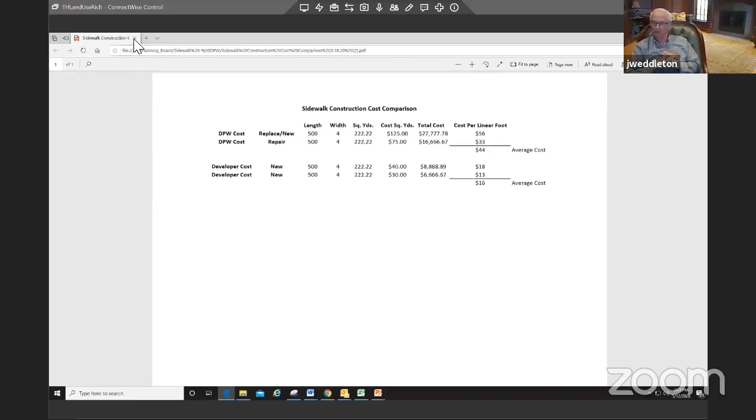Is there any way we could have the option of having somebody who's putting sidewalks on both sides of the street in a subdivision taken out, forcing them to put the sidewalk in a place where it's better needed? Because two sidewalks on one road is really overkill when there's so many streets in town that don't have any. I'm just afraid that it's going to be much more convenient for somebody on a site to just put two sidewalks in rather than pay the money or put a sidewalk someplace else.

Yeah, I think that's where we need to—well, I would say we have this policy and we'll have a cost per linear foot. But John, I agree with you. If we get in a situation where somebody says, listen, I'm just going to do what's in the regulations, it's going to be a balance. We want to try to encourage them in some cases, especially when there's two sidewalks. I think we'll probably be in a good position to encourage them that they're probably going to want the waiver on the second one.

And I think we can do that. We want to try to advocate for that. The idea would be, if it requires two—right now it's two, correct? Right. So on the residential side, it's up to 7 units, 7 homes, where there's only 1 sidewalk required. So for the most part, anything above 7 houses is going to require 2 sidewalks under the regulations right now, unless it's a smaller scale development.

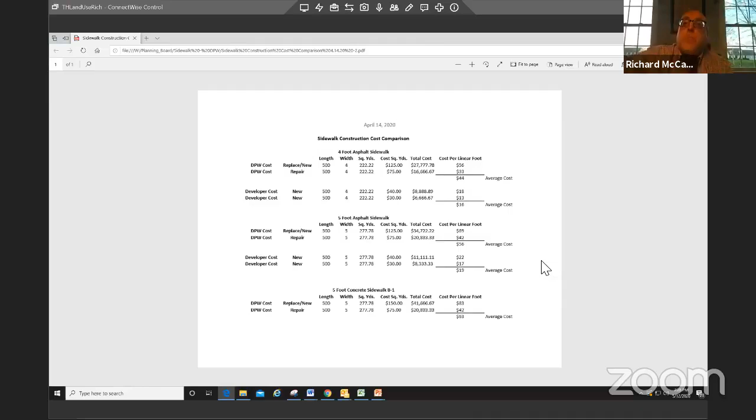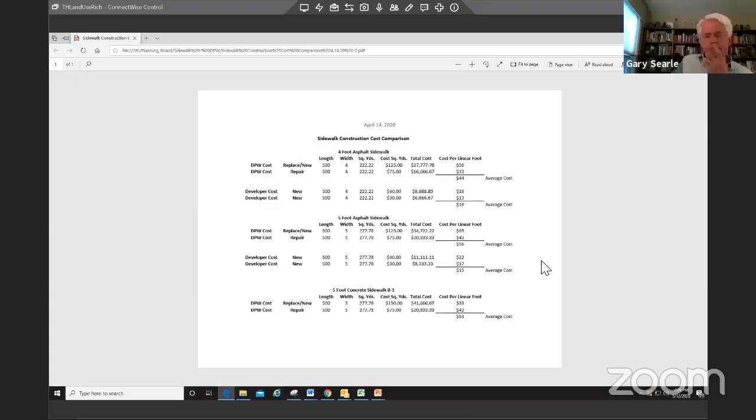So again, 30 sounds not like an average to me. If it costs DPW $70 a linear foot and costs the developer $22 a foot, the average is 45. Didn't we hear developers say they wouldn't pay that, that they'll just put sidewalk in for $22 a linear foot in front of their property? Yeah, I was trying to get to a price per linear foot that we would not discourage them with, so they'd give us money instead. Yes, I think the issue was the $10 we had in there originally - it's been going on for a few years - was pretty low. So we need to raise it so we can have some funds. And where's the happy medium?

I think Rich got the 30 because the cost per square yard here is based on a 500-foot length of roadway, so the actual cost per linear foot - for DPW it's 56 and 33, the average is 44. Developer is 18 and 13, so the average is 16. And I think that's where you got your 30, Rich. That's... well, go ahead.

I just put in 2,000 feet of sidewalk last fall, and I'll tell you, it cost me more in the range of $35 to $40 a foot. The reason this whole item is so hard to quantify - probably one of the biggest costs, even more than the paving, is the cost of the gravel to prepare the sub base. If you've got an area on organic soil, the cost to dig that out, put in a foot and a half of gravel, compact it, and then tar - for a developer that's probably more in the range of $40 a foot. If the gravel is already in place and all you've got to do is compact it and put the 2 coats of paving on, then it's probably more in the range of 25 to 30.

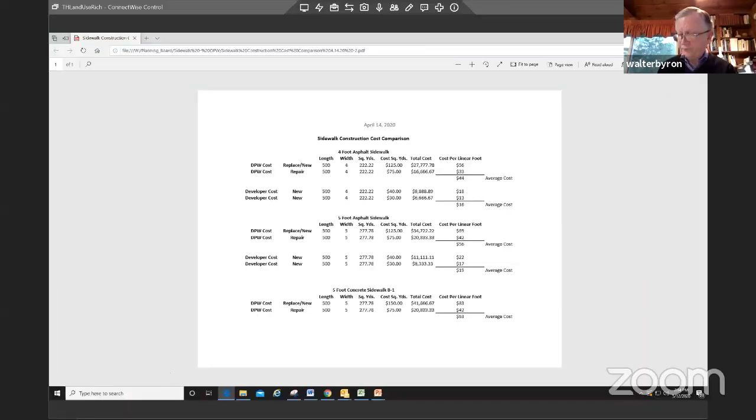Thank you, Gary. So I will screen share the language right now so everyone can take a look at it.

So the first article is removing the provision that would allow for a two-family as an option within the affordable housing bylaw. If you recall, this first came forward when Cranberry Heights was before the planning board. They were trying to give consideration to do a two-family. The more we analyzed and dug into it, it seemed really infeasible to make it work as a two-family and still work within the context of a development. The thought being there's not really a valid reason to have it on there since in practicality we really can't work with it. So the thought was just to remove it from the affordable section of the bylaw.

I did have some other conversations later with the Affordable Housing Trust as well, and they did agree, although I don't have anything in writing from them. We discussed that at a meeting, and it dovetailed nicely with the whole discussion with affordability, even with Norway Farms—although it's on tonight, it's not related to that specifically—but the whole notion of trying to integrate affordable, inclusive development, that there are other ways to accomplish the same goal. So this would just delete it from the bylaw.

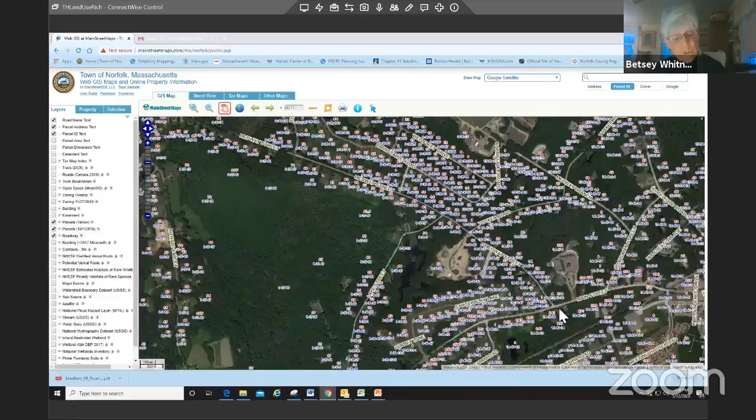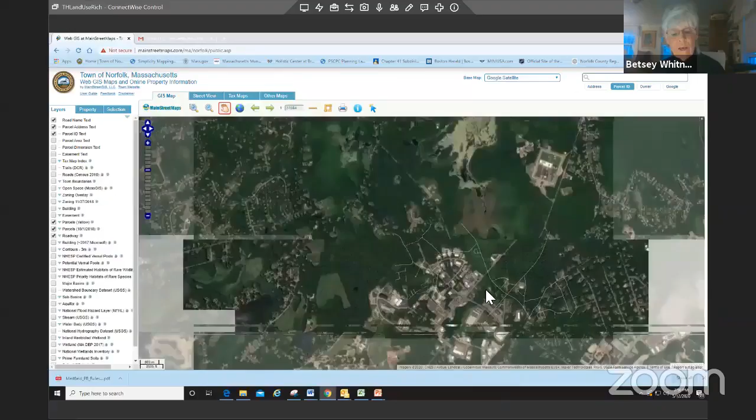My focus areas are the undeveloped parcels of land in the C1D district on Valley Street, Hill Street, Old Pond Road, and parts of both Pine Street, or Route 115, and Dedham Street, Route 1A, which lie in Pondville in the C1D district and may be pursued for development. And why have I done this? As a long time Pondville resident, some 39 years now, which I've said many times, I would sincerely love to have available the option of residential development by special permit in the off and on highway locations in District C1D.

If successful, this would add to the off-highway residential trend already voted overwhelmingly and begun at town meeting in 2013. That was bylaw J7A23. On a personal note, this particular town meeting, which I remember so well, the bylaw change voted 61 yes, 16 no, I believe is recorded proof that Pondville and the town of Norfolk in general have spoken.

I think it's very important to remember that this bylaw proposal is not intended to take away or stop commercial as a development right. It is simply adding the option to also be able to develop residentially, should a developer wish to go that route. And again, I emphasize that special permit is the safeguard.

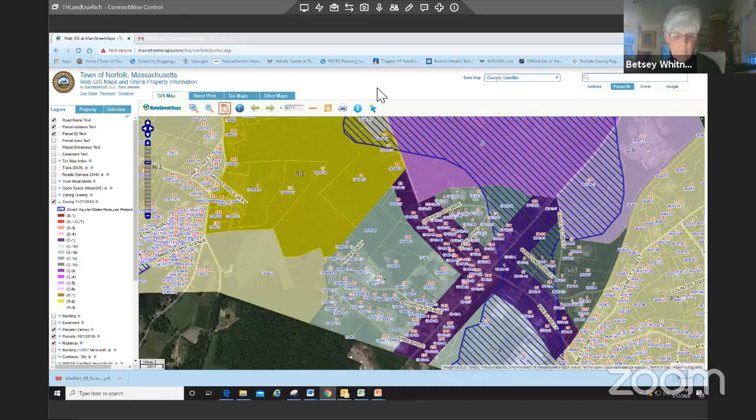So I am hoping that this article can be included in the town warrant so that perhaps Pondville will have the opportunity, at least the opportunity, to round out the residential areas that have already started in our district. Thank you, and I'll be very happy to answer questions.

Well, thank you, Betsy. I think one of the things that is a bit confusing to me and to Rich and to one or two other members of the board is we thought that what you're proposing is already allowed. And Rich would, I think, back that up by telling you where in the bylaws we believe what you're proposing is already written. So Rich, could you point that out? Sure.

Just to understand it, so this use C1D is where this already does allow this residential density. So I'm wondering, it sounds like your intent was just to add, and I'm just going to use my cursor, that you just wanted to add this language right here, not the C1D, because that already exists. This here, this provision under the J7A1C. I thought that referred to off highway.

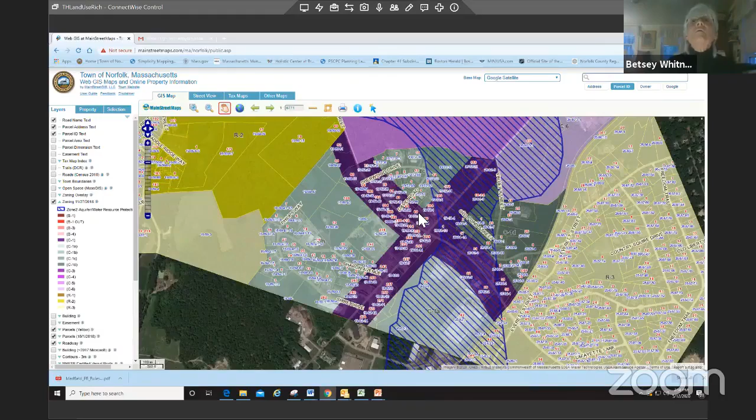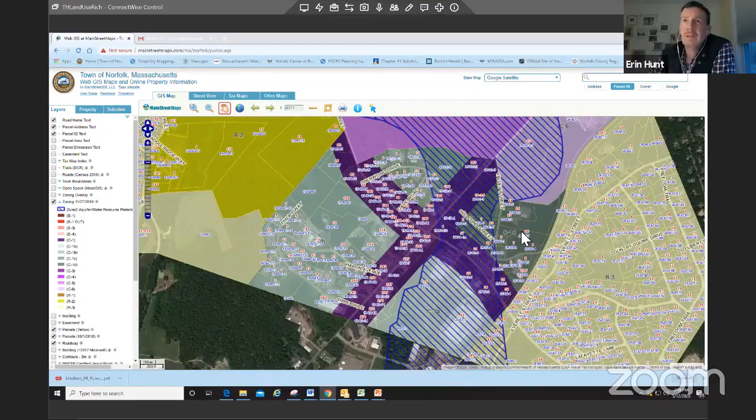So the purple, that's it, in the C1D, which is that upper area. No, this purple here. See this purple? No, that's C1, not C1D only. Rich, can you pull up the zoning map? Sure, can you see the map? Yeah, so this area right now presently allows multifamily housing.

That's what's on the books currently, under J7A2E. This proposal would amend and add into section J7A1C a special permit for multifamily in the on-highway section. This is the on-highway here, this purple. So on-highway, yes, Pine Street, Dedham Street. No, Rich, I disagree - it's just within the C1D part that's on-highway. That's right, just in the C1D, not the on-highway in the other three sections of C1.

So you just want this section right here? That's C1D - right here, see that C1D? That's C1C. Yes, C1D is the other side of 1A. So this section here? Yes, that was correct.

All right, so let's clarify - we're talking about the on-highway section within C1D, not the on-highway section in the other three sections of C1. That is correct, not the other three sections, C1D only.

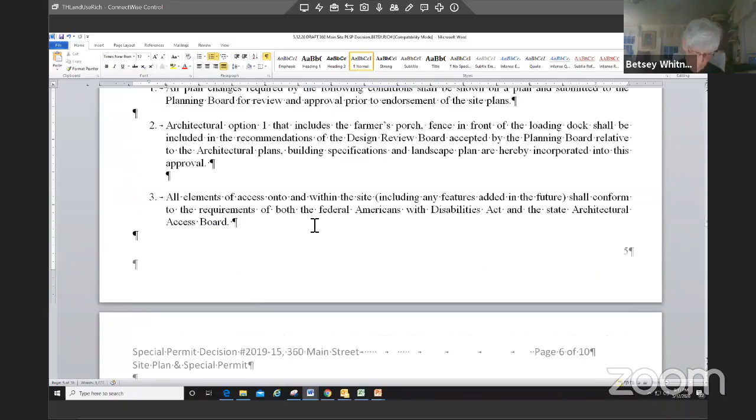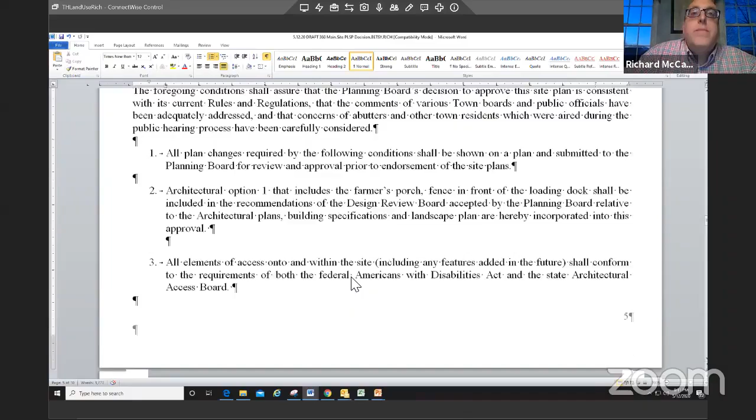So on page 5, I added architectural option into this condition for the design review board. The other comment Gary made was to spell out SWPPP, Stormwater Pollution Prevention Plan, because it was abbreviated. That was it, so all the other comments have been added into this final document.

Rich, can you scroll up so I can read 2, please? The planning board had wanted to have the makeup of the porch enhanced with a bigger fascia board and a higher pitched roof to give it more bulk. That was from the planning board, not the design review.

I can maybe separate it out, actually. Did they change their plan? Did they adjust the plan for that? They did. Who's on? Hey, you on?

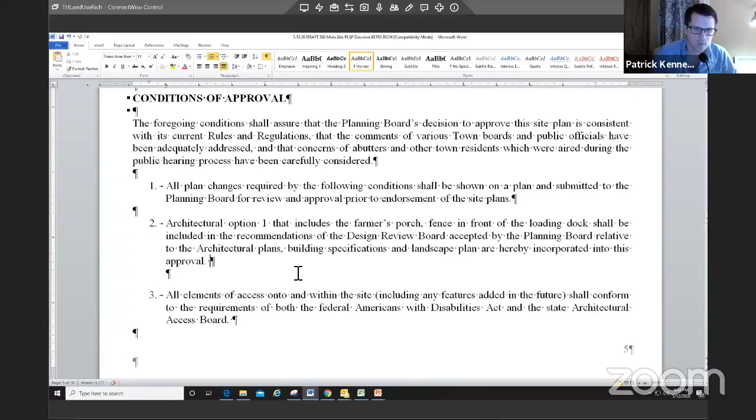Is Patrick on? Hey guys, this is Patrick Kennedy, the architect for Spec representing Camdra Coatings. We did not provide an update to the board regarding that. We have it in drawings, but we don't have it sent to you guys just yet. My recollection was you agreed to it at the meeting, but just haven't caught up with it in plans. Correct. We were going to just wait for the design review board to take a look as well, in case they had any comments.

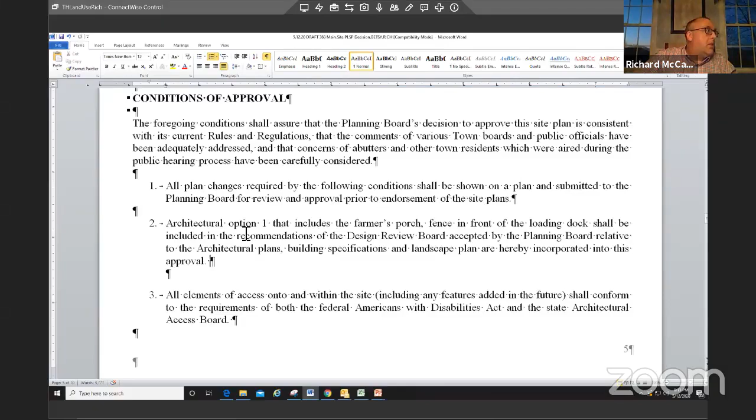So what I'll do, John, is I'll separate this out. I'll go back to the original condition relative to the design review board, and then I'll make this the condition of the planning board. As long as the design review board sees the adjusted schematic from Patrick, then approves it, that's fine for me. Okay, all right, sounds good.

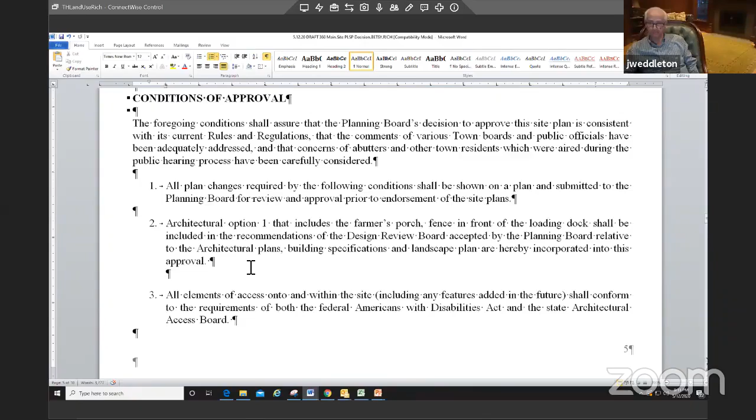Any other comments from the board on these three decisions in front of us? Any comments from anyone in the Zoom audience on these three proposed decisions? I just wanted to ask, this is Katie Enright, the project engineer from Howard Stein Hudson.

What was the number filled into the sidewalk fee? 30, 30 times whatever the linear frontage is. I believe it was around 100 feet, wasn't it? The number is 30 that she's looking for, 30 per lineal foot, but they want a dollar amount there.

Right, okay, so I can get you the number of frontage right now. Yeah, but the dollar amount was $30. There's a specific fee in the decision specific to this, we have 151 feet of frontage. 151 feet? Okay, so, 4530. 4,530. That's what the math says. Okay.

I'll put that in there. Rich, you put that in there too? Yes. Okay. Any other comments from anyone on board or in the audience?

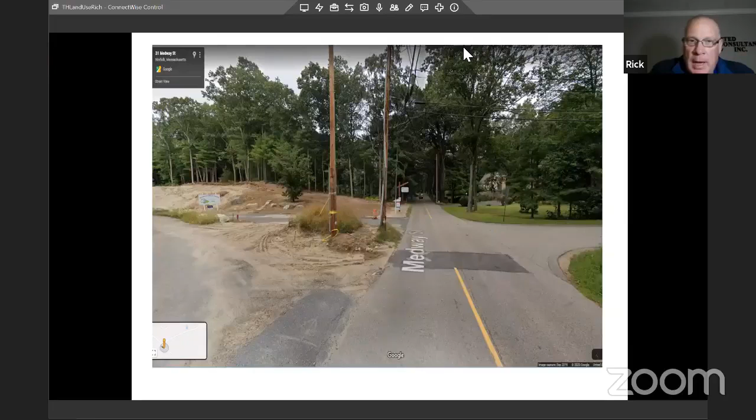So the proposal is to reposition the sidewalk slightly to the south of the original location, which was the guy wire for the existing pole. So the guy wire is really what's creating the bigger part of the relocation proposal.

So Rich, if we could—so what the proposal is, is to relocate the ramp, and you can see to the bottom of the page, just below Norway Farms Drive, that there's also a proposal which we wanted to discuss with you to eliminate the crosswalk and also to eliminate the sidewalk installation from Norway Farms Drive heading towards Lake Street. So that's why we proposed the ramp location further into the development and the elimination of the sidewalk and the crosswalk. We've had and have been paying attention to the board's discussions earlier this evening, which Rich and Barry had mentioned to us in the field last week, that the board is entertaining payment into a sidewalk fund.

Seems that the board has codified that number at $30 per linear foot. We have estimated this sidewalk to be around 380 linear feet that we're proposing for removal, again heading from Norway Farms Drive towards Lake Street. So there's actually two things in play. I hope I didn't make it confusing to follow, but the proposal to eliminate the sidewalk, the crosswalk, and then the relocation of the ramp all kind of tie together.

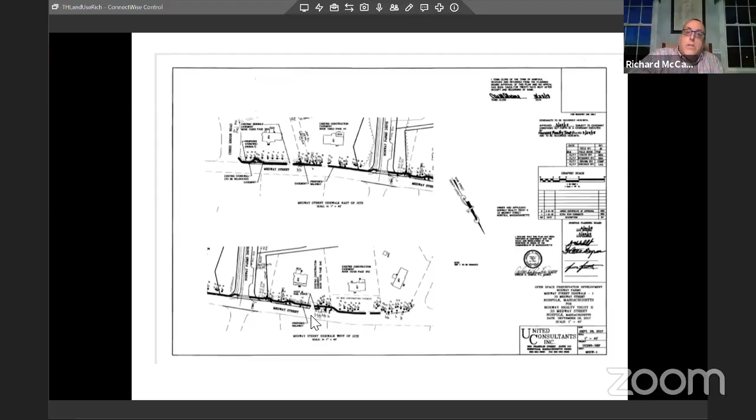Rich, on this bottom drawing, can you go back to that drawing? All right, yep. The sidewalk runs in front of two existing homes, correct? That was retained on these lots to be able to construct the sidewalk. If I remember correctly, there was a lot of back and forth with the residents about saving trees and putting the sidewalk in the appropriate place and all that.

So, all right. So their expectation is that there's going to be a sidewalk down there. It strikes me that before we accept the proposal to accept funds in lieu—I couldn't keep track of the presentation. It seemed like there were 5 or 6 items that were being asked to review. Can someone summarize them? Want to summarize them, or revise them?

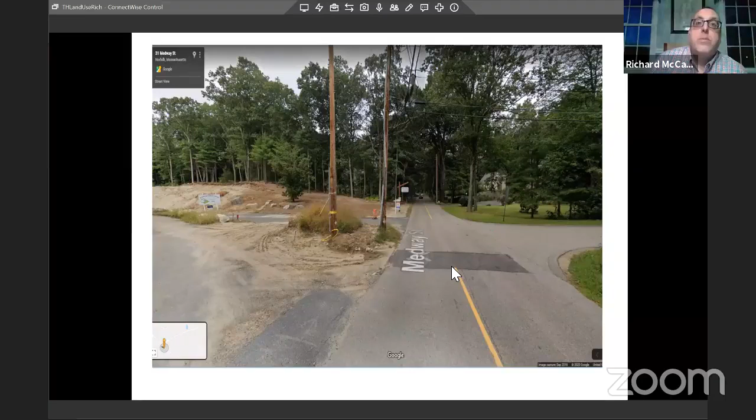Okay, the pole that was set after the subdivision was approved, because it would otherwise interfere with the guy wire. It's hard to see, but there is a guy wire here. So Rich, just real quick, let's just list them, right? So there's a sidewalk change because of a guy wire. All right, that's one.

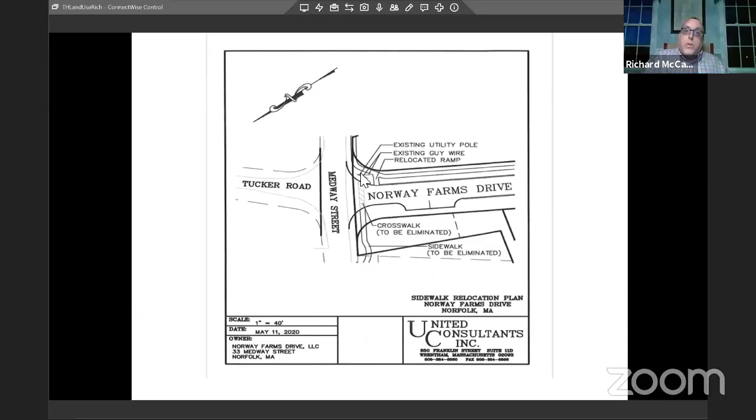And then the second one—sorry, wrong way. If you see where my cursor is, this is a sidewalk heading this way towards Lake Street. Continue to move forward, keep as is, construct the sidewalk, or we can consider taking payment in lieu, not to construct this sidewalk.

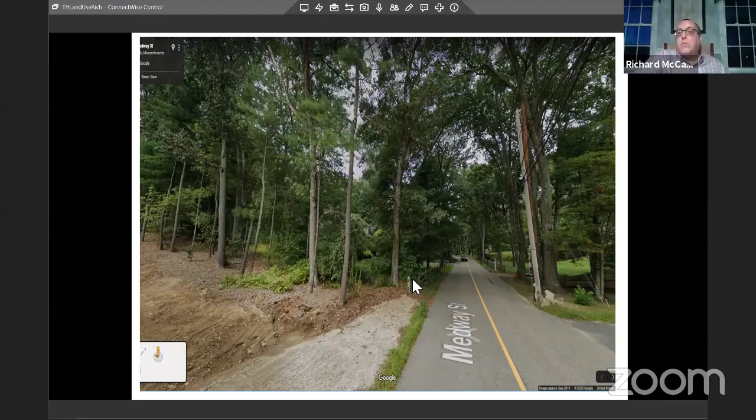Barry, Rich, but again, that's the second bullet point. I thought I heard like 5 or 6. So are there only 2? There's only 2. All right, why the number 380?

Let me see if I can. I think the question is: was that originally part of the subdivision? I mean, there—the open drainage with a swale, it would be hard to construct. And in an effort with the open space for the idea of connectivity for them.

Norway Farms Drive to Lake Street as shown on this approved plan, which was part of the definitive subdivision set. As you can see on this proposal, a crosswalk connected the sidewalk on the proposed sidewalk side, the easterly side of Norway Farms Drive.

Ramps were to be installed, and then the sidewalk ramp coming down from the crosswalk, labeled where the utility pole is. A crosswalk would be constructed across Norway Farms Drive, connecting to the sidewalk with a handicap ramp on the westerly side, and then continuing 375, 80 feet or so down to a terminus point near the intersection of Lake Street. So that's what was approved.

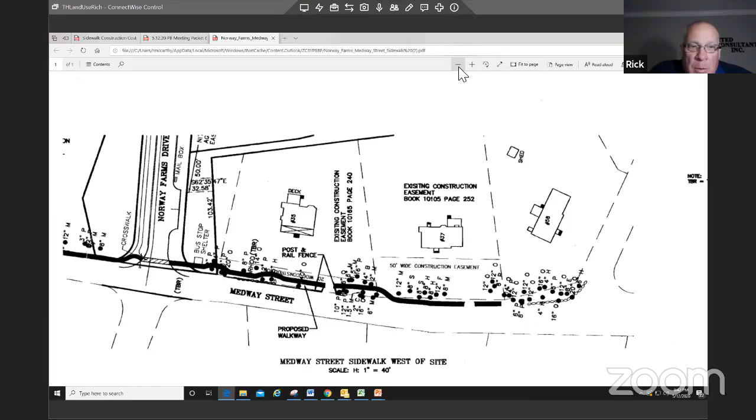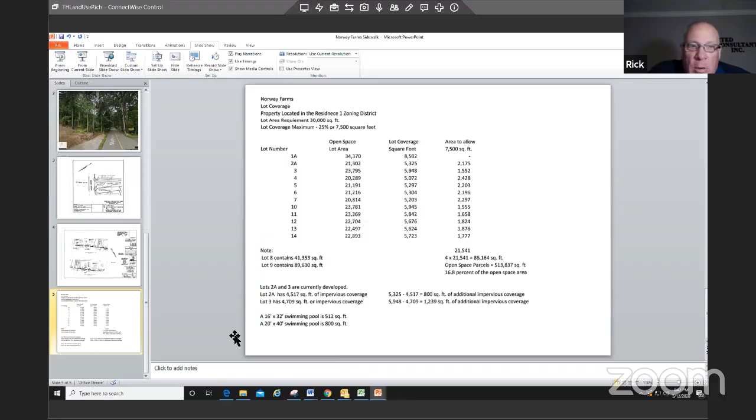So our proposal now is, working with the utility company, to not construct the sidewalk between Norway Farms Drive and Lake Street. And then number 2, to relocate a portion of the sidewalk by flattening out the radius to a straight section, basically going between the guy wires and the property line with a relatively short, straight piece of sidewalk.

Now, what that has done is, if the board was inclined to agree to not have the developer construct the sidewalk between Norway Farms Drive and Lake Street, we would no longer need the crosswalk.

And the curb ramp location has been moved further back into the development so that it would provide for people to cross into where the 2 parking spaces are and where the proposed mailbox location was. Now, the mailbox location has been relocated, but that area was basically set up for school bus children to be picked up and dropped off, parents to be positioned in those 2 spots, things of that nature.

Near the intersection, I'm always of the mind to relocate or reposition handicap ramps and exit points to sidewalks away from the intersection, if possible. I don't like them mid-block, but a little bit away from the intersection. That way it allows for less potential conflict as somebody is coming into the development.

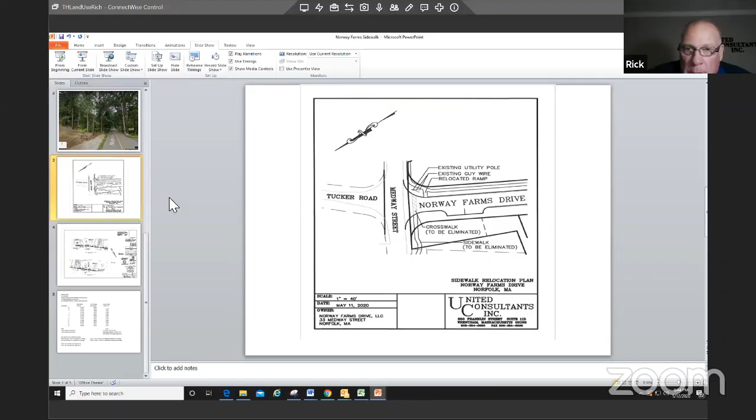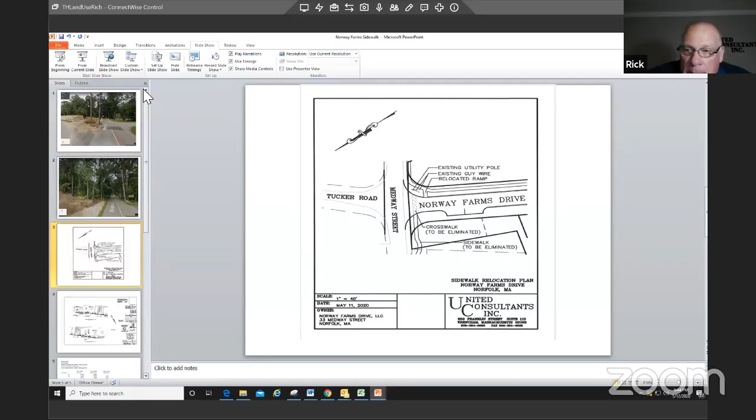So the result of the two proposed changes — one is the elimination of the sidewalk, one is the relocation of the sidewalk — I guess you could say it snowballed into the relocation of the ramp, which was traveling through where the guy wires have been installed, and that obviously isn't going to work. And then it comes to the point of, do we need the crosswalk if we're not going to construct that length of sidewalk? So I don't know if that clarified it for you.

We're up to 4 changes. That's good. Well, yeah, it's a lot more clear, Rick. Thank you. Okay. Sorry about that. No problem.

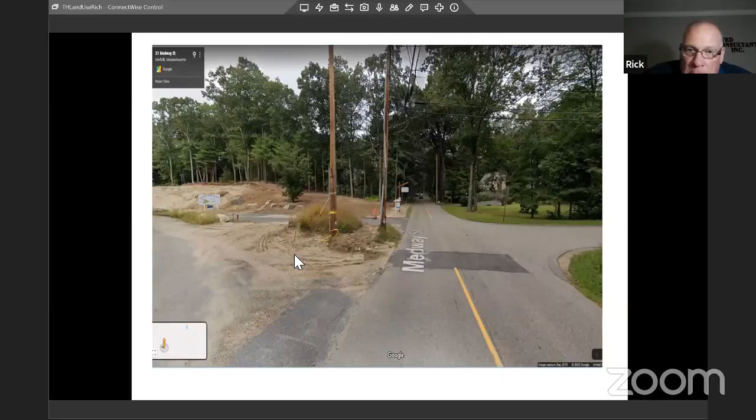And again, if the sidewalk is not constructed and the board feels that they want it constructed, then the ramp's going to be relocated from where we're showing it now, and the crosswalk will be added as well. So those two are really dependent on if in fact that sidewalk is or is not constructed heading between Norway Farms Drive and Lake Street.

So all of this was set off by the guy wire. That's what caused us all to meet on the site. And at that meeting, we came up with the alternative to relocate the sidewalk. And then the discussion began about eliminating the sidewalk.

Right, so on Main Street, there's at least 2, if not 3, guy wires that I walk under going to the train every day, or at least when we were going to the train. So couldn't we get Eversource to come in and put in a canted guy wire and just go back to the original plan?

They are canted guy wires that you could walk under. But if you can see, there's actually 2 guy wires. So at the southerly end of those guy wire label lines is a vertical guy wire. I would estimate, Rob, maybe you can clarify, it's probably 8 feet up. There's a horizontal wire that travels out, and then a vertical wire that travels down at the end of those lines. So could the sidewalk ramp go underneath those and provide access?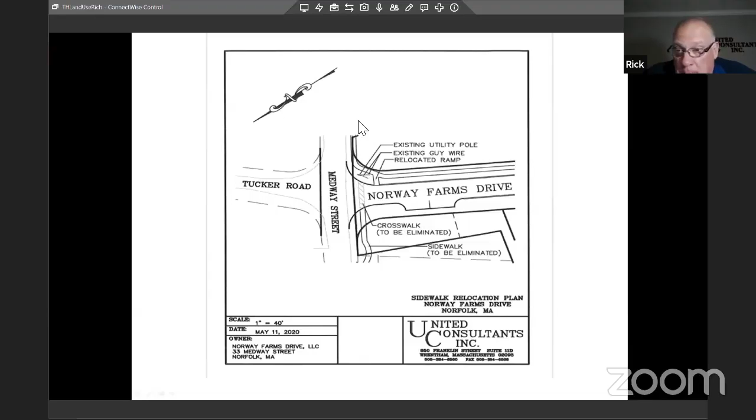What I'm saying is we've come up with a solution to address the guy wire issue. If the board was inclined to entertain it - which we're not really going to talk about this evening unless Attorney Maitland would like to speak to that - number two would be the relocation of the sidewalk portion caused by the guy wire on Medway Street, and two sub-items would be the relocation of the ramp and the need or elimination of the crosswalk. That's going to be dictated by the board's pleasure regarding the sidewalk installation on Medway Street.

Okay, so we're going to have a public hearing on these proposed changes, correct, Rich? Yeah, you would have a public hearing on these proposed changes. But I know, at least hearing from Aaron so far, it may be wise to have DPW invited to give the rationale on the other piece of it, which is the sidewalk heading towards there. There's concern about it. I'd rather clarify a little bit more before holding a hearing, and then hold the hearing - maybe one more bite at it.

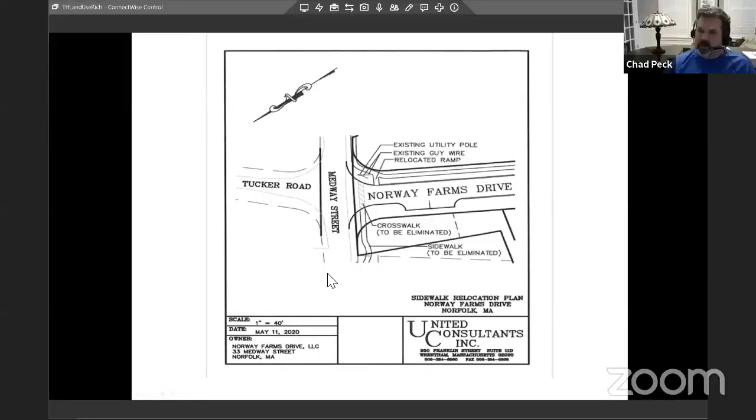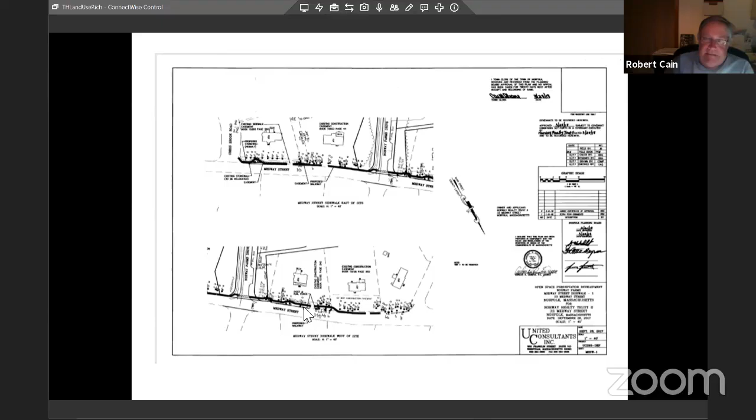I could address that, but this goes way back. So again, the idea of the community - whatever, I had proposed that, and we were asked not to include that because the feeling was that it was going to be more of an attractive nuisance than something that would really benefit the kids.

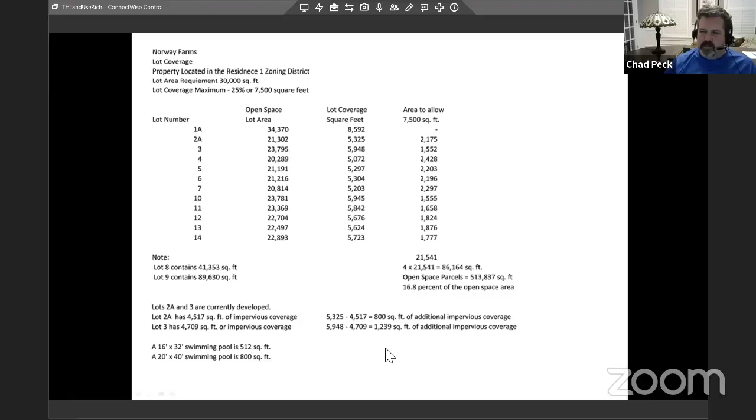I just saw that on there that was approved, and I was like, well, if we were considering removing the sidewalk going towards Lake Street, maybe we should at least continue the sidewalk all the way to that bus pickup location, the bus shelter. But it sounds like that's been reconsidered as well. Yes, that was during one of the earlier meetings, way back.

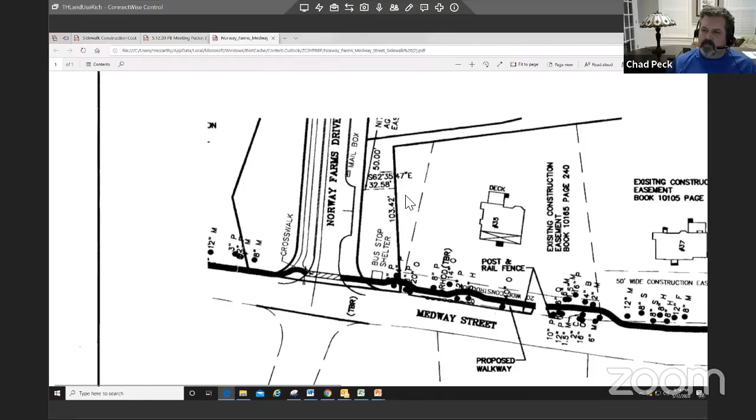So really, if I understand it, there wouldn't be any particular need to include the sidewalk on both sides of Norway Farms. Really wouldn't be the need for the crosswalk, and just to bring it over just a little bit - that would be pointless, it sounds like.

Except for the fact that at some point the planning board thought it was a good idea. It sounds like the original plans were approved this way because instead of putting sidewalk on two sides of the street inside Norway Farms, they decided to do the sidewalk on one side of the street, and the second sidewalk would be out here. Yes, that's correct, it was roughly about the same footage. That was a driving factor rather than giving money to the town, so I said I might as well just put it out in front of our place. Now fast forward 3 years and things have changed again.

So now let's reconsider this piece from Norway Farms to Lake Street. The DPW was the one that brought that up, saying this sidewalk doesn't serve a huge purpose at this point. The beginning of the conversation with them, after we dealt with the crosswalk and the guy wire issue, was to get rid of some of the meandering aspect of it, so if the town connected to it and went to plow it, the guys wouldn't be plowing into people's front yards or trying to go down the street where there was no sidewalk. It'd be a lot more straightforward to just move that picket fence and come right down the street. There are a couple of trees that are a little tight right above the Y in Medway Street, but prior to Barry, we had looked at this with Bob McGee, and Bob thought there was probably enough room that we could squeak through there and straighten it out a little bit.

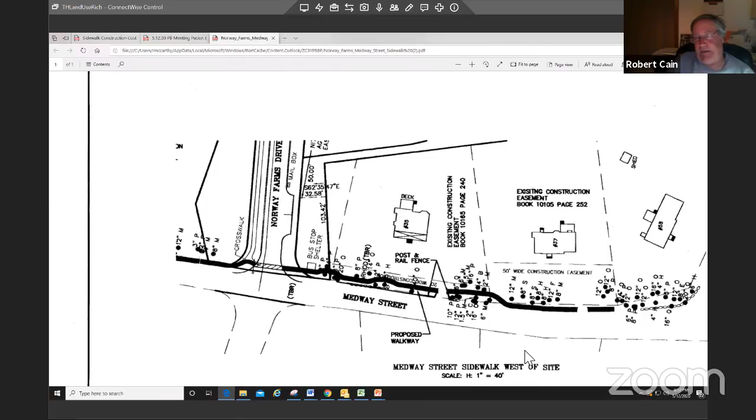How far does the sidewalk go in the direction towards Main Street? It's basically 2 lots in either direction, with 150-foot frontages. So you're basically like 600 feet in each direction, give or take. No, it was about 400 feet from the intersection of Norway Farms Drive to Crestbrook - I believe it was 400 feet or so, 385 to 400. Oh, you have that easement in there. Correct. So you have the section from the crosswalk area traveling to the end of your frontage, where the beginning of lot 31, the house number 31 lot, begins.

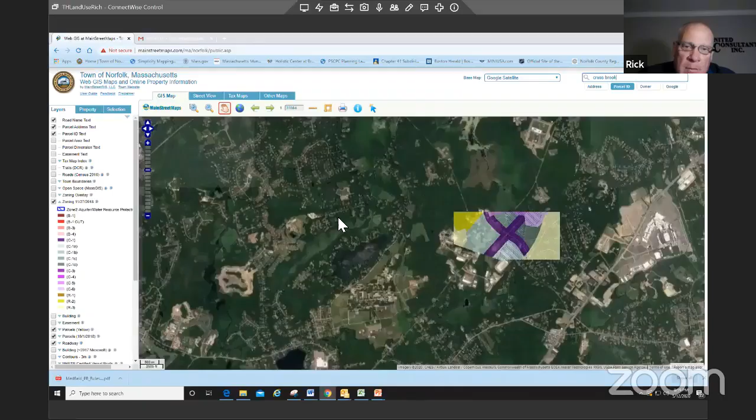So that would provide basically a loop from someone starting at the Crestbrook Medway Street intersection, being able to travel up Crestbrook Road to the cul-de-sac on a sidewalk, then through the trail constructed by Mr. Cain that connects the cul-de-sac of Crestbrook Road to the cul-de-sac just constructed for Norway Farms Drive. Then someone could traverse down the southeasterly side of Norway Farms Drive on their sidewalk out to Medway Street, take a right where the pole is located at the intersection, and then traverse the sidewalk that's going to be constructed along Medway Street back to the corner of Crestbrook and Medway.

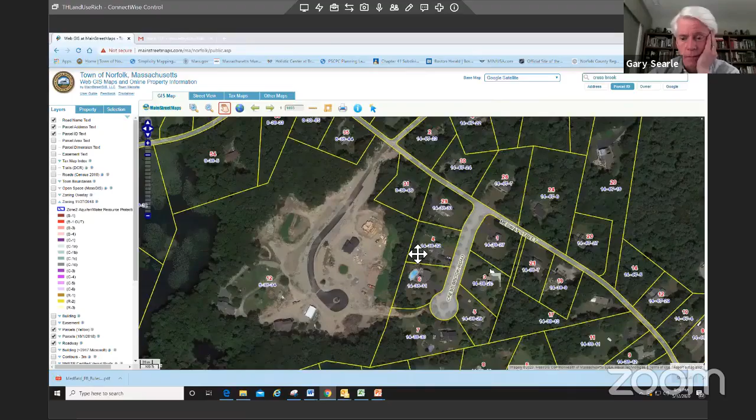Yeah, to me it makes sense to head in the direction of Main Street - there's just a lot more to connect up to, and that's still being proposed. So there's basically a loop heading down Cress Brook Road - you can see the path that's been cut from Cress Brook Road into the development under construction. There's a sidewalk at the cul-de-sac traversing back up to Medway Street, and then the sidewalk will be constructed along Medway Street, basically creating a big loop for the two neighborhoods to be connected via sidewalks and trails. That's good, thank you for the clarification on that. I think it looks like a good compromise.

Oh okay, well we will be very happy to present an application for modification amendment. We'll get on your agenda for next June and hopefully can wrap it up. Thank you, Elizabeth. Thank you all.

Thank you. Okay, so Chris Henry, 30 Boardman Street. So I would make some counterpoints regarding this small sidewalk we're talking about - the argument for keeping the sidewalk as it goes to Lake Street. Number one, I have no doubt in Rich's ability to work around the guide wire, so I don't see that as being a big obstacle. Number two, I think we're sort of already waiving the subdivision requirement for the sidewalk on the other side.

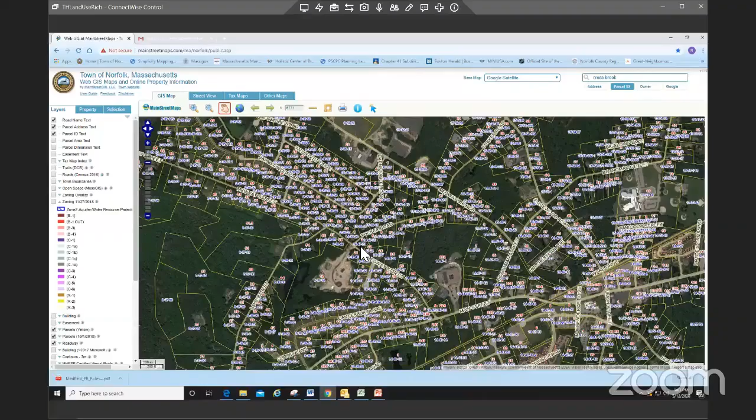In my opinion, we undervalue the cost of these sidewalks in reality compared to what we charge the builder for them. As an example, we're charging about $30 a foot, whereas the DPW estimated it to be over 100. So we're already discounting it, and I think to give away that 300 feet of sidewalk is short-sighted.

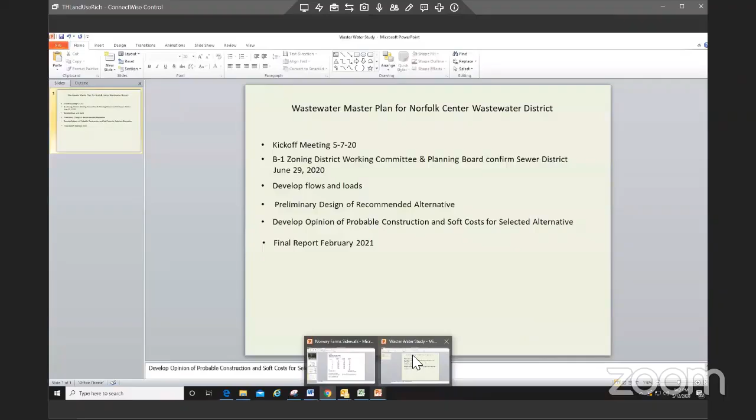Maybe it doesn't connect now, but through other developments there'll be more money in that sidewalk fund, and we'll have a way to fund that connection. Like I said, Cape Cod Estates is one of the biggest neighborhoods, and the sidewalks come really close but don't quite make it all the way there. Medway Branch is another example, where the sidewalk comes all the way down to Tucker and then stops short for that last 500 feet. So we kind of have these sidewalks to nowhere all over.

I think we should take the opportunity — we've got a builder here and a planning board that laid out in advance even the other two lots that this sidewalk is proposed to run in front of. The planning board at one point said it's a good idea to have these setbacks in this frontage here. It's there already, so let's take advantage of it. That's my opinion.

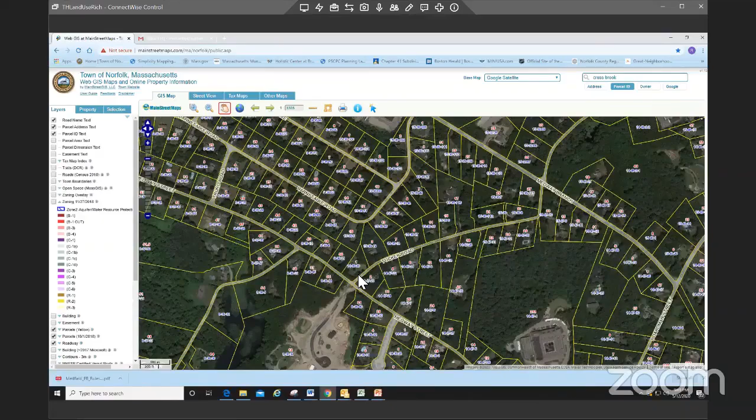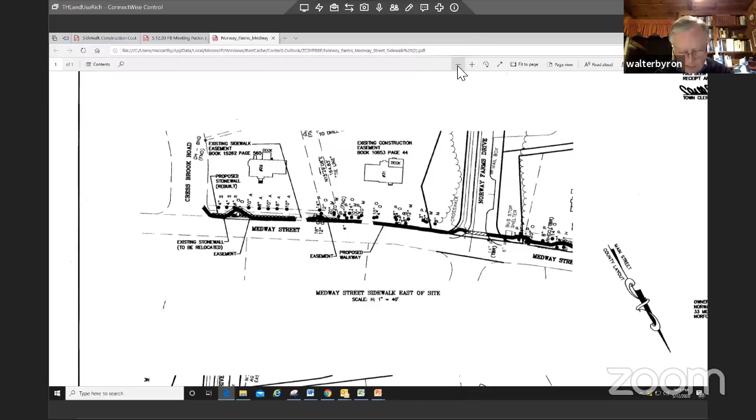All right, well, we welcome your comment and look forward to hearing further discussion on it at the public hearing next month, or whenever we schedule that.

Thank you. All right, any further discussion on Norway Farms? All right, hearing none, thank you all for that discussion, and we will move along on our agenda.

Thank you. Good evening. Thank you. Yep, thank you. Take care. Let's see, next item on our — you're muted, Gary. Yeah, you're muted.

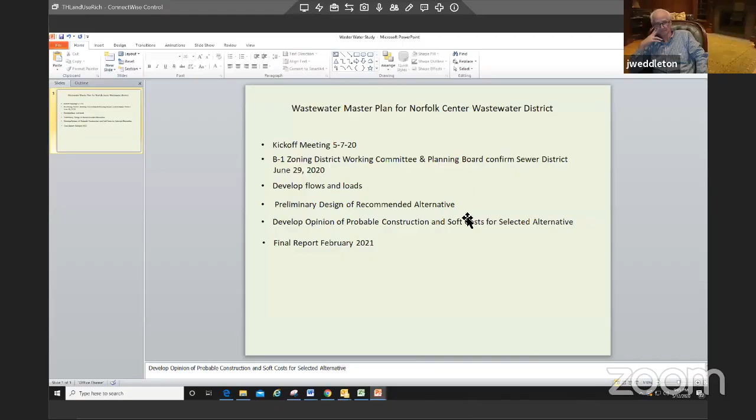Sure, let me just — Rich, I should say, not Rick, Rich. No, that's fine. So just quickly, the points on the screen — you see the screen? Yep. Okay. So we did have a kickoff meeting last Thursday with the engineers for the wastewater master plan, putting together the sewer district boundary, discussing some options for it, and the proposal we'd like to do.

The next step is to have a joint meeting with the B1 committee and the planning board at the B1 committee meeting at the end of June, the 29th of June, to review the limits of the wastewater district for now. After discussing and confirming that district boundary, they would go into developing flow and loads for potential build-out of the district from a sewer flow capacity standpoint.

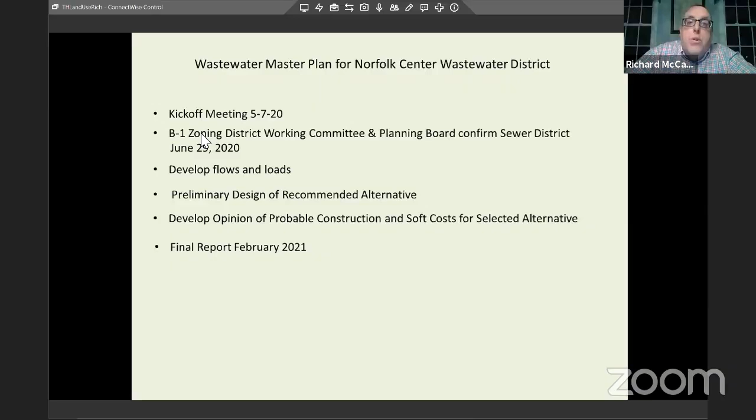As a recap, right now the wastewater treatment plant has 30,000 gallons a day flowing to the plant. Part of this study is analyzing the potential for reutilizing unused capacity, since we're not actually flowing at the design flow volume to the plant, as well as potentially looking at further expansion of the plant for additional flow, or other alternative options. The master plan study would include looking at another wastewater treatment plant potentially based on flow volume, or perhaps tying into the wastewater treatment plant at MCI Norfolk, which is going through a design upgrade process right now.

So again, part of it is district boundary design — pick a preferred option and carry it through for potential hard cost and soft cost, with a wrap-up of the report by February of 2021. One option being analyzed is a no-action option, which is essentially status quo, don't do anything with the wastewater treatment plant. That's kind of a quick overview.

Okay, any questions on that? All right, thank you, Rich. You want to talk about streetlight specs? Yeah, if I can.

So the issue of Abbyville, which is the comprehensive permit before the planning board for approval right now — they have requested a streetlight that's not within our specs right now, our subdivision regulations. So I wanted to, bear with me as I'm talking, I want to get to the...

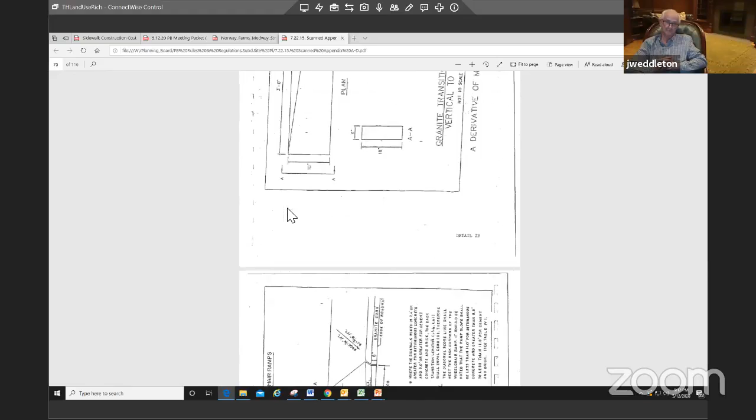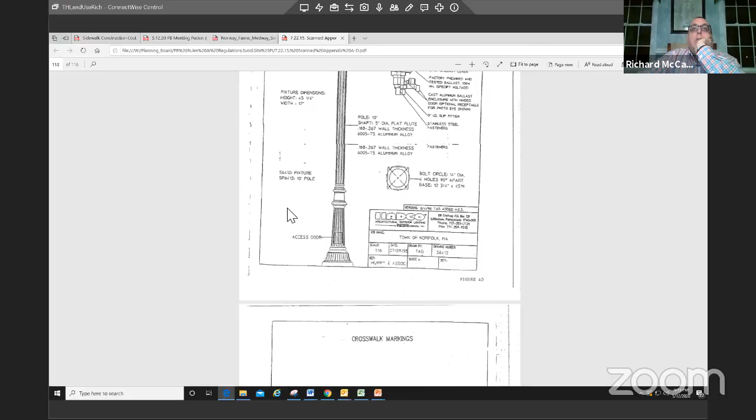Hold on, I'm almost there. Must be the last one. Oh, there we go. So this is our... can you see it on screen?

Yep, that's what we have in town center, right? Right.

And so this one, I know they just recently installed this at, well, Fox Run, because we gave them—I provided them this spec for the light. They just installed them at Bristol Pond Estates too, I mean, as well, not two.

But so maybe, point taken, maybe forward over to design review board, kind of give it some thought. I mean, I like these fixtures, but personally...

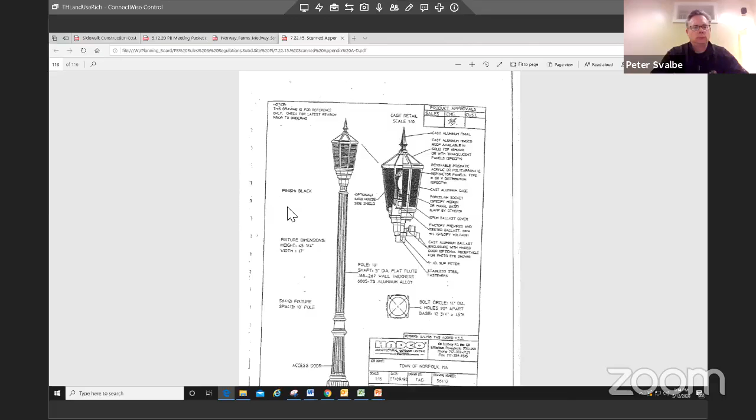Now these, granted, maybe they're not as compliant with dark skies, but they do come with shields too, so you can put shields in the panel on the backside if people want to have light not directed towards the home. And just by the way, these aren't LED. They do make a similar LED, but we haven't converted over to LED.

Is this design compatible with LED? They do make a fixture like this with an LED light. Okay, I don't think it's this company, but I have seen them.

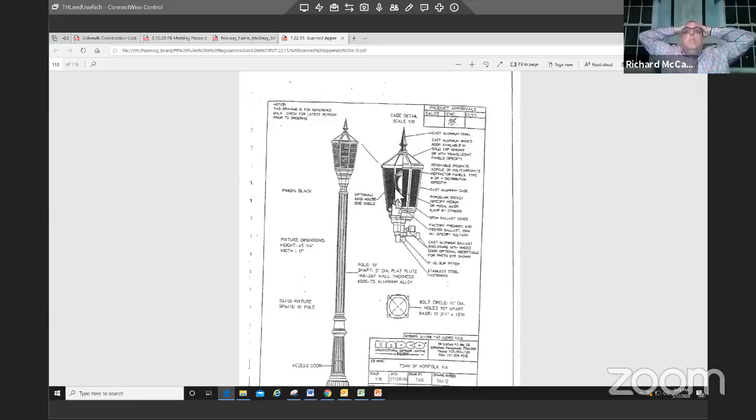Yeah, I think it's a good idea to let the design review take a crack at this. Okay, all right. So I'll send that to design review and get some feedback from them. We can report back to the planning. That's it, you're the last guy on the list here.

All right. That gave me enough time to open something.

All right, so we did have a meeting a couple of weeks ago. Some big development, which was important because we're trying to figure out a location to put documents.

So we got word today that the site was set up. Thank you, Rich, and the IT group. It now just needs to be populated, which is good. We can put the MAPC report there. Right now it's buried under land use links.

We just didn't think it made sense to go look there logically. So we'll get that reposted. It'll show up on the front page of the town site for a while.

Until other developments happen, it looks like we're headed towards a very brief presentation at the next town meeting from the MAPC on the report, to sort of introduce it to the town. Again, that's more of a presentation, not a discussion type scenario.